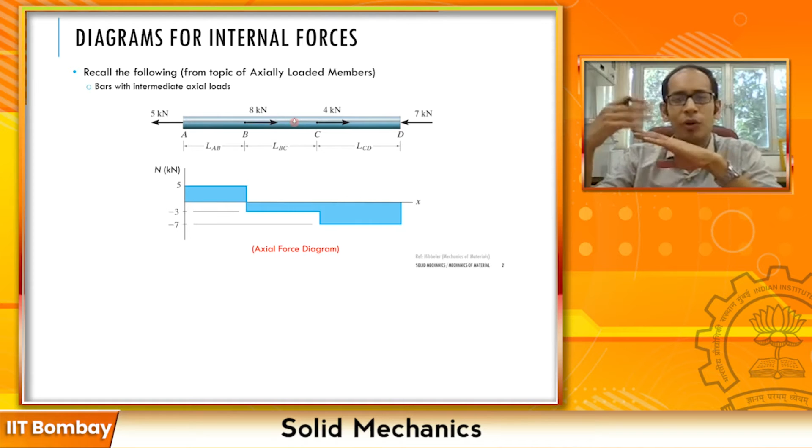But while solving this problem, while calculating the overall delta or whatever you want to calculate, remember that we had looked at each of these individual segments between the points of discontinuities of the force. We had gone and drawn the corresponding internal force diagrams.

So for example, over here, what we had done, suppose if I take a section and call this section 1, if I take a section here and call this section 2, and so on, and I can take one more section over here and call this 3.

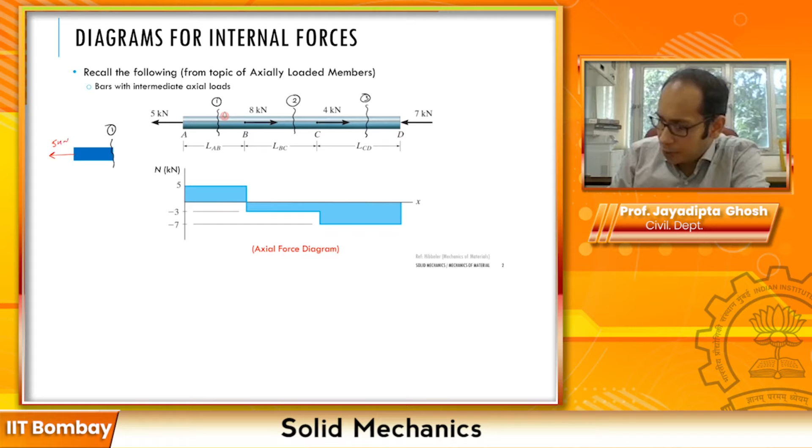Now for section 1, if you remember that when we had drawn the free body diagram, this is the part, this is my section 1. Here I have a force of 5 kilonewton, so I am going to have an internal force over here in 1 as 5 kilonewton.

So if I go ahead and draw the internal force in this segment from A to B, it is a tensile force, and for these internal axial loads, what we are saying, tensile is positive and compressive is negative. It's a type of convention. We had gone and drawn this 5 kilonewton over here.

Similarly, if you take another segment number 2 over here, and if you draw another free body diagram from this left hand corner A all the way to 2, you will find that the internal force comes out as -3. We have done this in the chapter on the axially loaded members.

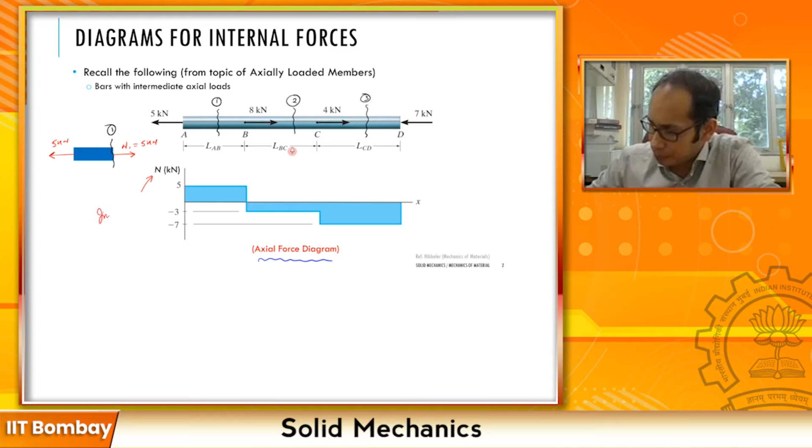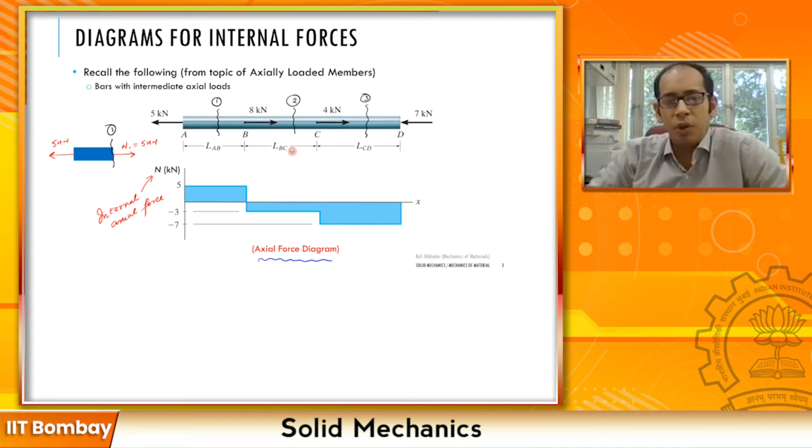So essentially what we get at the end of the day is this axial force diagram. This is also a diagram of the internal forces. Remember, this N that you see over here was nothing but internal axial force. So we have already gotten a glimpse of how the internal forces vary.

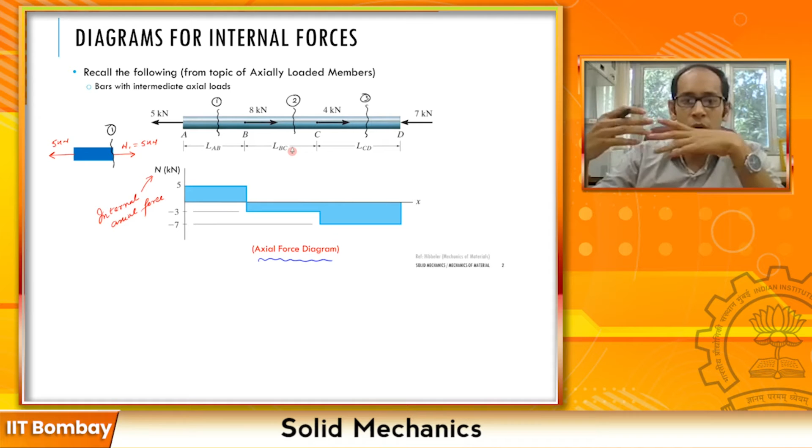Now, this is a bar which is under pure axial loading, although it's non-uniform. There are no loads which are acting perpendicular to the longitudinal axis of the bar.

So in essence, it is not functioning as a beam. Now let me go ahead and present to you a beam over here. This beam, as you see, is a cantilever beam. It is clamped at this particular end.

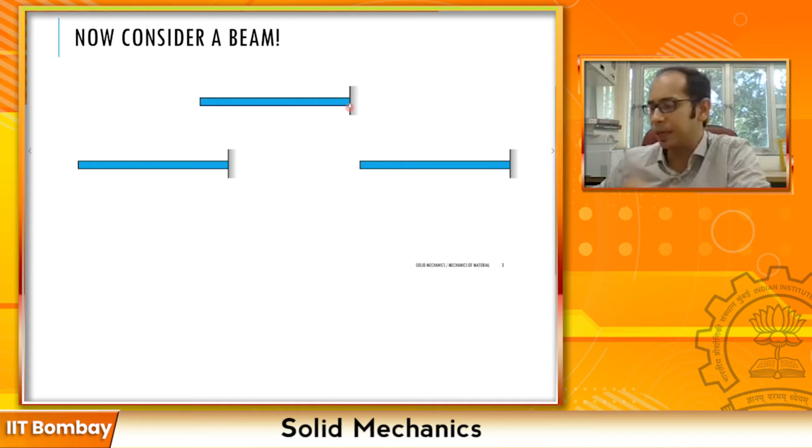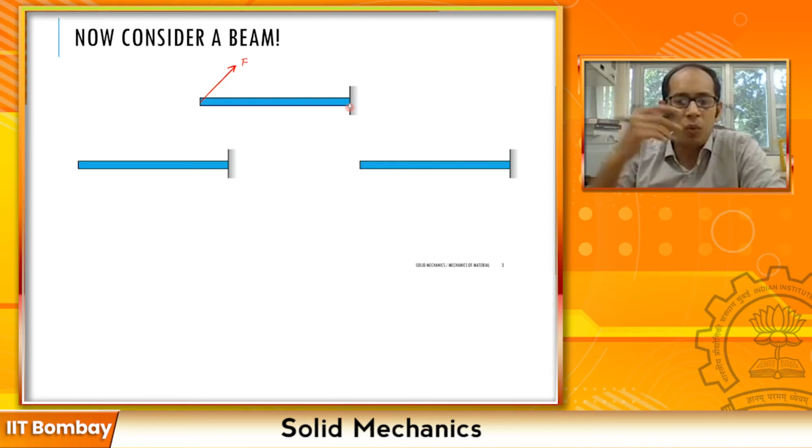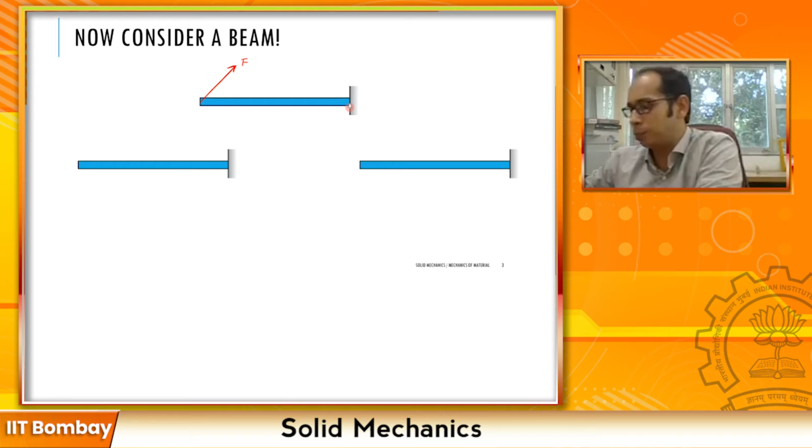Now, for this beam, if I apply a load, maybe a load about this particular direction, say I'm going to call the load F. Now what kind of internal forces and internal stresses does this load impose? For this F, I can split it into two components, one vertical and one horizontal. Let me go ahead and draw them. Suppose this is the vertical component and this is the horizontal component, and let me put names to them. Suppose this is my P and this is my Q.

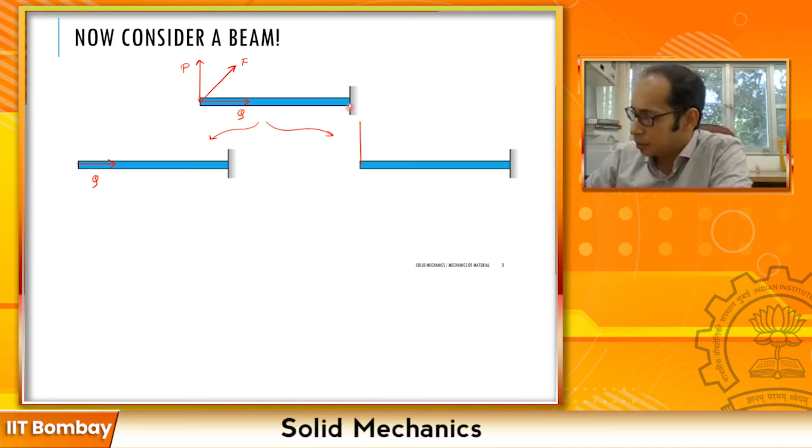Now remember the principle of superposition. This force F, I split into P and Q. Now if I apply the principle of superposition and draw this beam as two different beams, then in the first beam I'm just going to apply the force Q that is acting, and in the other one I am going to apply the force P. Both of these together essentially give me my original loading.

Now this is the case which we have already seen. We have seen that when you have a bar and you're pushing with a force Q, how the internal forces and internal stresses vary. So this is something which we have already done.

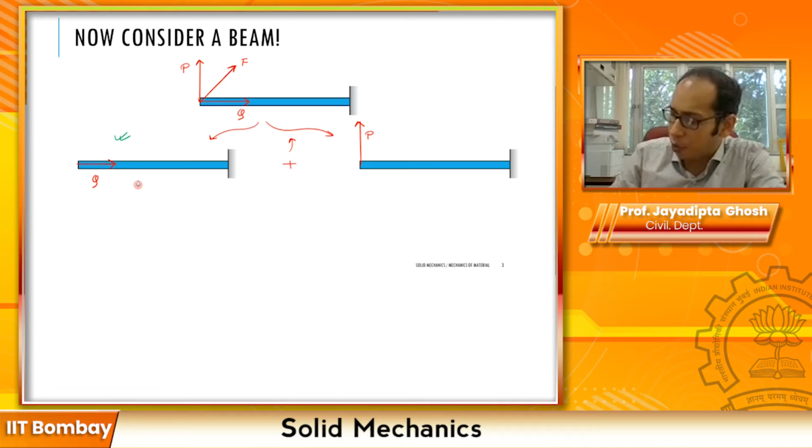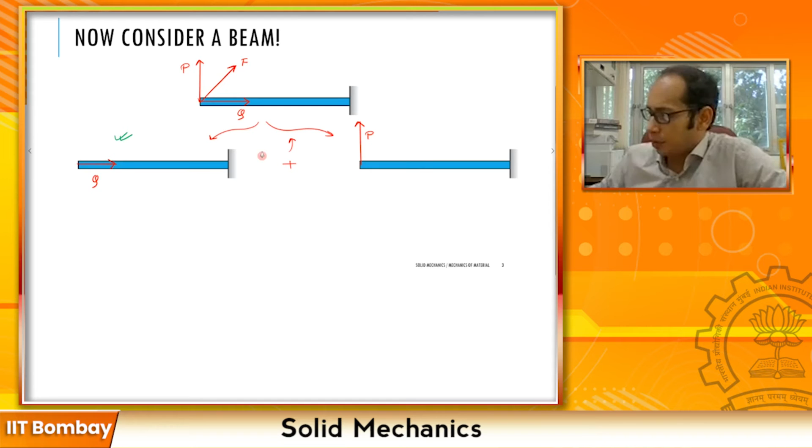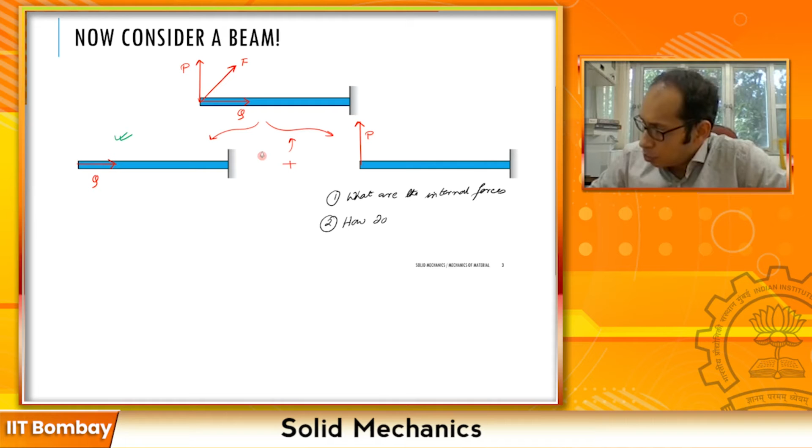Now the question is, for this particular beam on the right hand side, there are two questions. The first question is what are the internal forces, and the second question is how do they vary? We have not dealt with this case before. So for this load P, which is acting over here, I don't know how the internal forces vary along the length of the beam, and how do they vary over here. So this is the intro that will lead us to the path of drawing the shear force and the bending moment diagram.

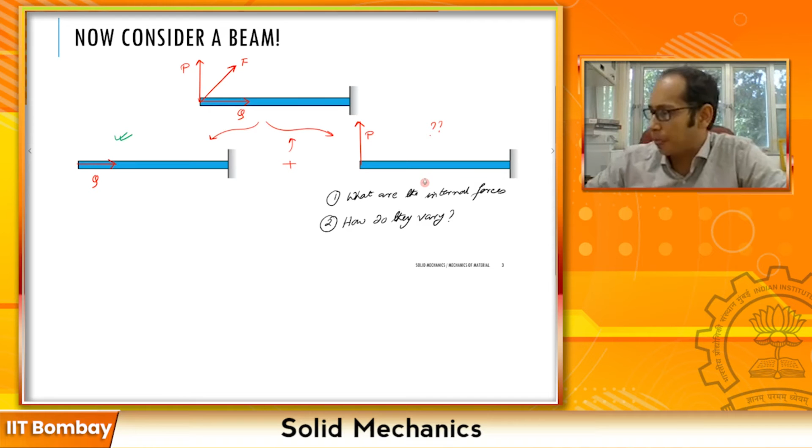Since we have already looked at this particular case, and investigated what kind of internal forces this imposes, let's go ahead and solely focus on beams where the loading is pretty much always perpendicular to the longitudinal axis of the beam. So let's look a little bit more deeply into this kind of beam structure. Now I'm going to present to you the same beam that is there.

This particular beam, A to B, as we saw before, and a load at the end, which is P, a vertically applied load. Now, similar to what we had done for the axial loading case, I am going to go and cut a section MN. So this is my section MN, where I've cut a section, and I am going to do the exact same thing.

I have a left side and a right side now. So let me go ahead and mark that. This is my left side and this is my right side over here, and I have separated and taken my left side. And this is my right side.

Now, similar to what we did, all I have to do is figure out what are the internal forces which are acting just to keep these individual chunks in equilibrium. So when I am looking at my left chunk, at this interface, I can have three kinds of forces. I can have a shear force, a force which is acting vertically down or up. I can have a moment, I can have an axial load as well. In this case, I'm not going to have any axial load because there is no force along the x direction. If you consider this is your x direction, so there is no force in the x direction, there is not going to be an axial force.

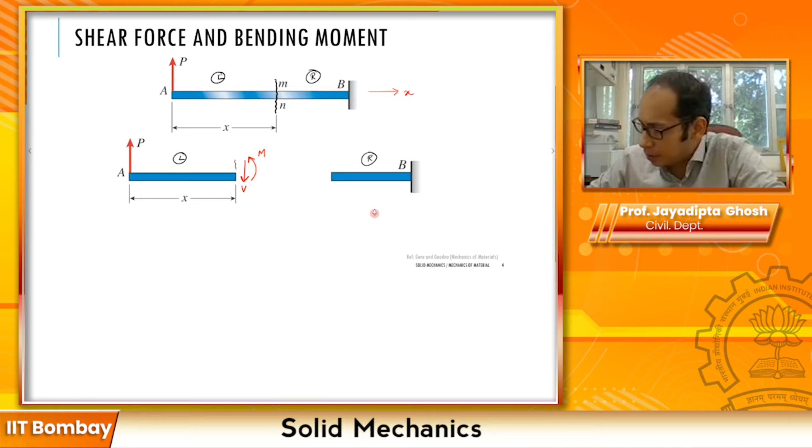So at that interface MN, the forces I'm going to have are something like this. I'm going to have a force V, and I am going to have a moment M. Now, since this section MN is the same over here and over here, let me go ahead and further elaborate. This is the section MN and this is the section MN over here. When I'm looking at the right hand side, I must have equal and opposite force V and an equal and opposite M acting over there, because that point is not going anywhere. That point is in equilibrium. So here also I will have vertically up V and clockwise moment M.

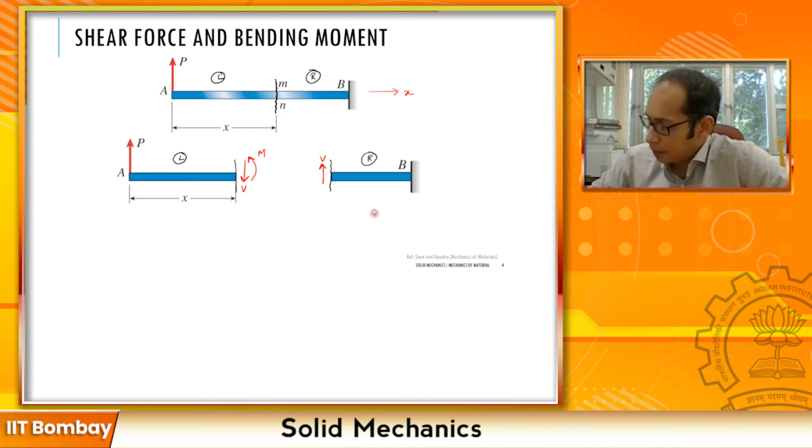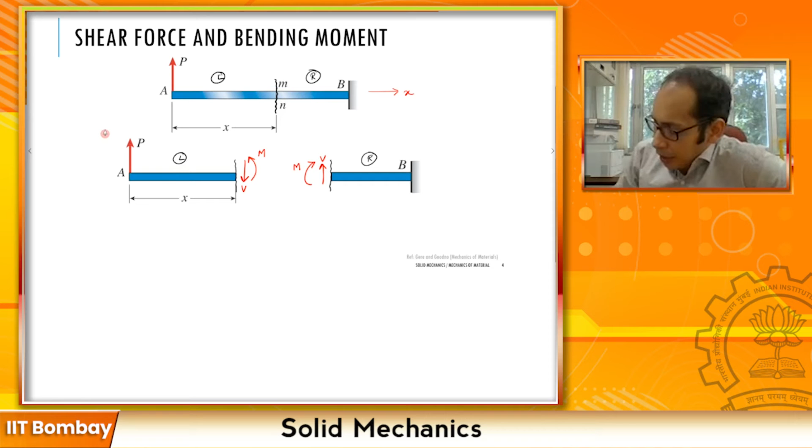Now, going from the perspective of pure establishing equilibrium, what do we get? From this particular portion, the left hand side, if I have to draw my V, if I am doing my summation of Fy equals to 0, this gives me my V as equals to P. So my shear force that is acting, V is the shear force. Let me write it more explicitly. So this V over here is shear force, and this M is bending moment.

So my V is equal to P over here. And how do I find the moment? If I take the moment of all forces about this section mn, doing moment equilibrium, summation of moments must equal 0. That gives me P times x, since I've taken this section mn at a distance x from the left, equal to P times x being a clockwise moment, plus V times 0, since I'm taking the moment exactly at this section, minus M. This gives the overall equilibrium equation equals 0, which essentially gives that your bending moment at that point is P times x.

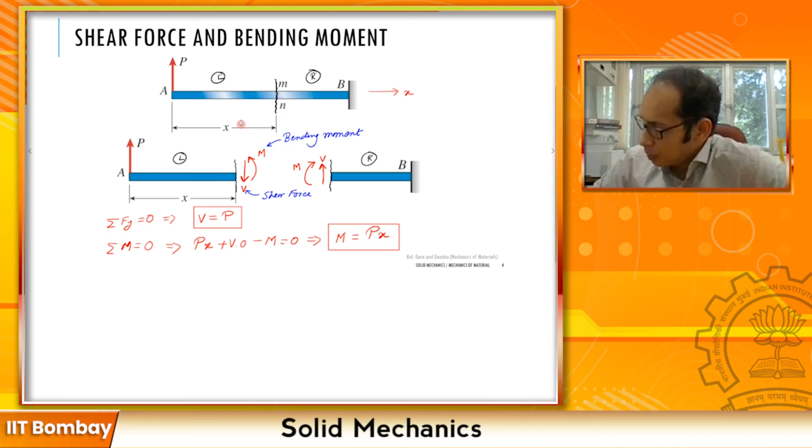Now try to appreciate what we just wrote. For this cantilever, with a load P at the left end, it does not matter where x is, my shear force anywhere I take is going to equal P, because V is only dependent on P, not on x. Whereas your bending moment at any section depends upon the load P and also the distance where you take that section. So it is P times x.

So this is a case where shear does not vary as you go from left to right, shear stays constant - we'll see this again when we draw the shear force diagram - and the moment is a function of x. The moment keeps on varying. The moment is 0 at this free end where x equals 0, and as you keep moving, the moment becomes a product of the load times x.

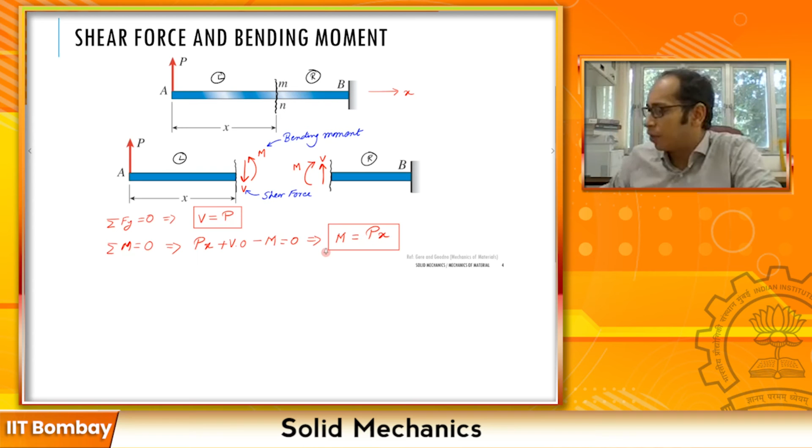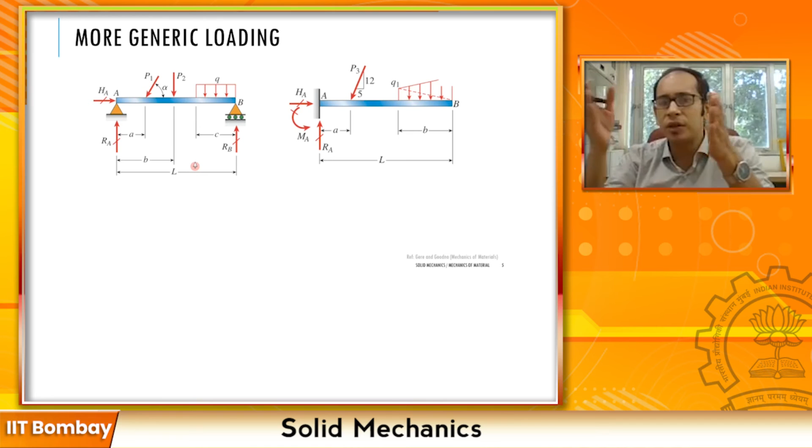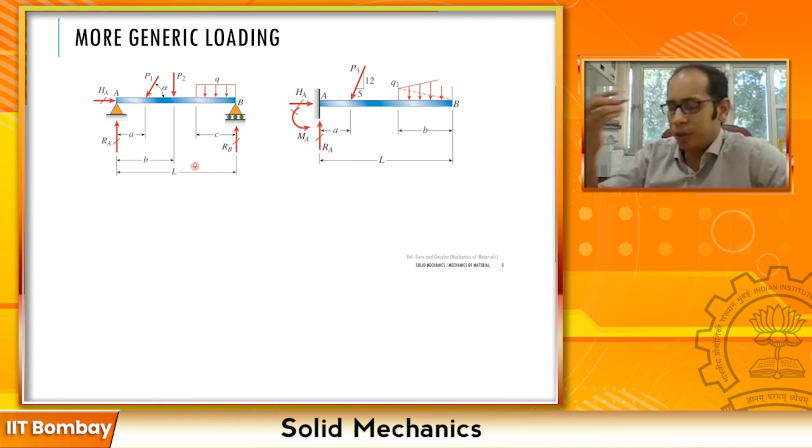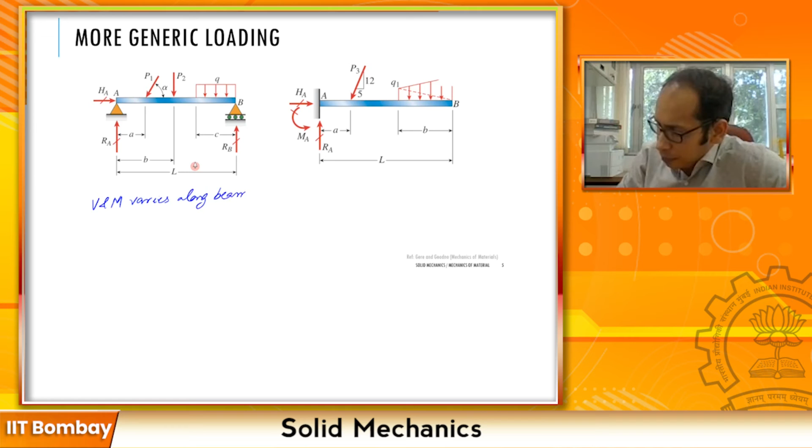So let's make a general note: V and M vary along the beam, depending upon the nature of the loading and the type of structure. So in a nutshell, how do we represent the variation of V and the bending moment M? We saw that the shear force and moment vary, but how do we capture that? The best way is to draw diagrams showing how, from end A to end B, depending upon the loading conditions and structure, the shear force V and bending moment M vary.

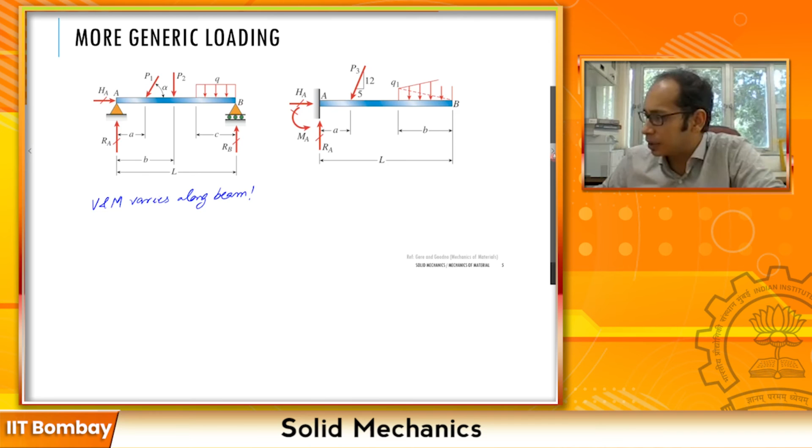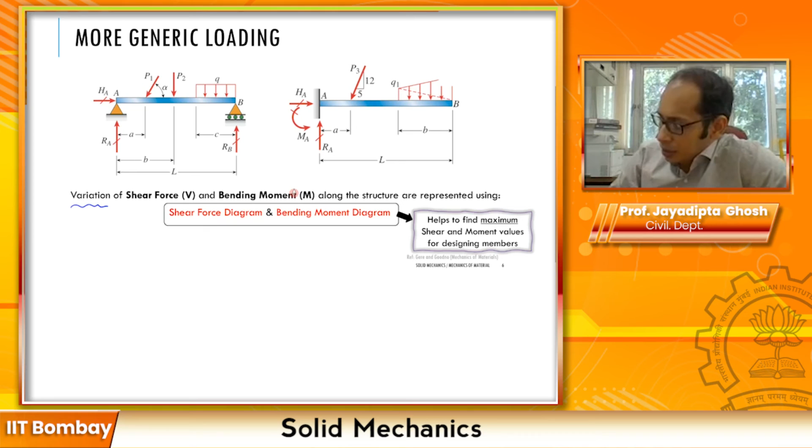So this is essentially what comes next: the variation of the shear force V and bending moment M along the structure is represented by the shear force diagram, usually termed by the acronym SFD. And for the moment, we have a corresponding bending moment diagram, known as BMD.

Typically in short form it is used that you draw the SFD and the BMD of this beam with this particular loading, right? And why is it important? Why are we doing all this? Why are we trying to break our head and take a beam with loads and find how the shear force and bending moment varies?

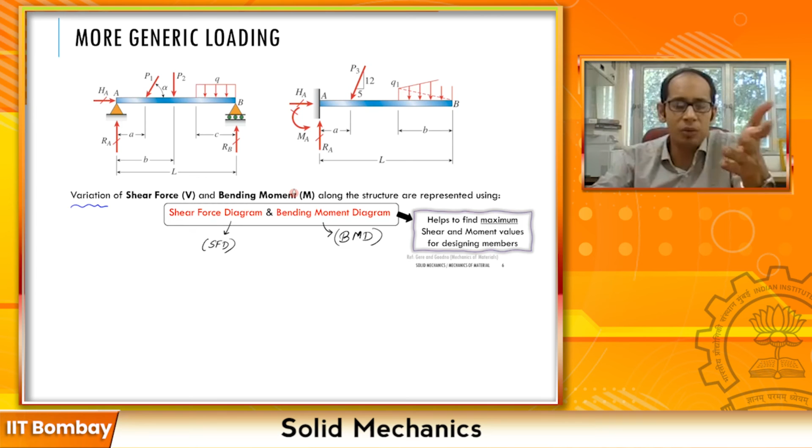The critical point to remember is that you design structures such that they don't fail at the points of criticality, within your structure, the room you're sitting in, the beams, columns and slab. The points along the beams are subjected to different kinds of loading, same with columns. If you draw the shear force diagram and the bending moment diagram along the length of the beam, you will see that there are points where these values peak, where they become maximum.

So if you keep increasing the load, these points become prone to failure. So the shear force diagram and the bending moment diagram help you find the maximum values of the shear force and the bending moment so that you are designing safe structures.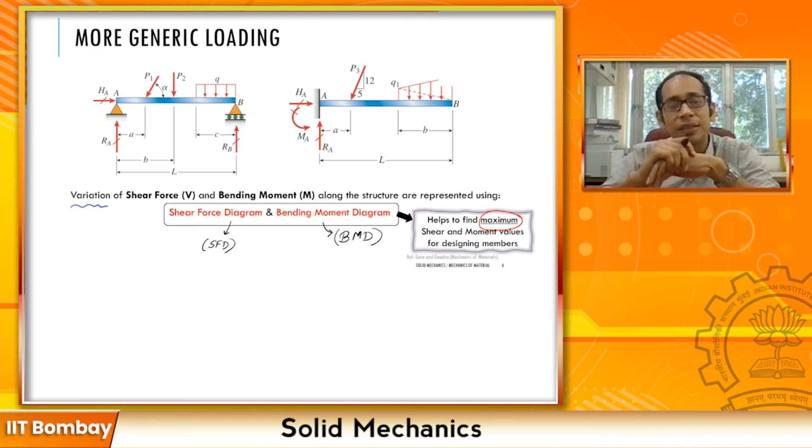This is applicable for civil engineering structures, mechanical engineering structures, aerospace structures, and has a wide range of other applications. So the whole objective of drawing shear force diagrams and seeing how shear forces vary across the structure, and how bending moments vary leading to the bending moment diagram, is so that you are designing structures which are safe to resist the loads the structure expects to undergo.

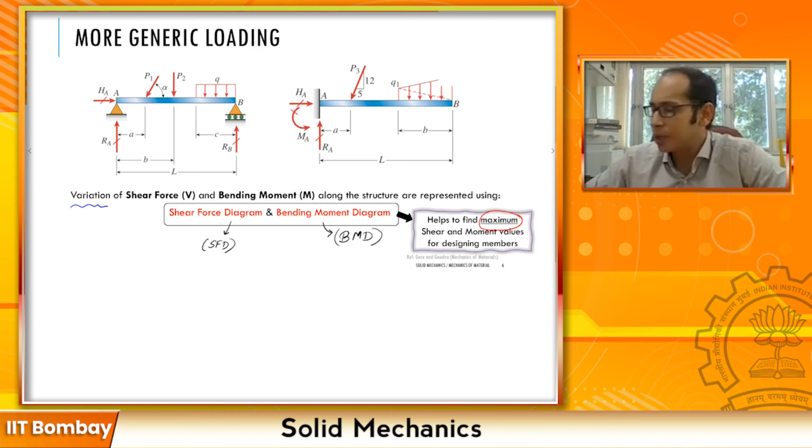Now, one thing I want to bring your attention back to: we wrote for this cantilever beam, which we just looked at, with an end load P, the shear force V and the bending moment M. Now, what is the convention?

Remember, we always have to deal with some conventions so that you and I are talking the same language. What's positive to you may be negative to me, but we have to have one convention so we understand each other. That's the whole point of having conventions anyway.

Remember that in axial loading, we also followed one convention: if the bar is under tension, that's positive. Probably you followed the same convention when you studied trusses in engineering mechanics. If the truss member is in tension, it's positive; if it's in compression, it's negative.

For the shear force and bending moment, there are also conventions. For example, take this beam: this section MN, I could have cut going from left to right or from right to left. When I cut this section from left to right, I have this V pointing downwards, M here, and at this point you have an equal and opposite pair.

So what is the positive convention for a positive shear and a positive moment? The positive convention for shear is that if the shear force is trying to rotate your element in a clockwise manner, that is called a positive shear. Take a look at this figure: this force V, if this is your element, tends to rotate the element in a clockwise manner.

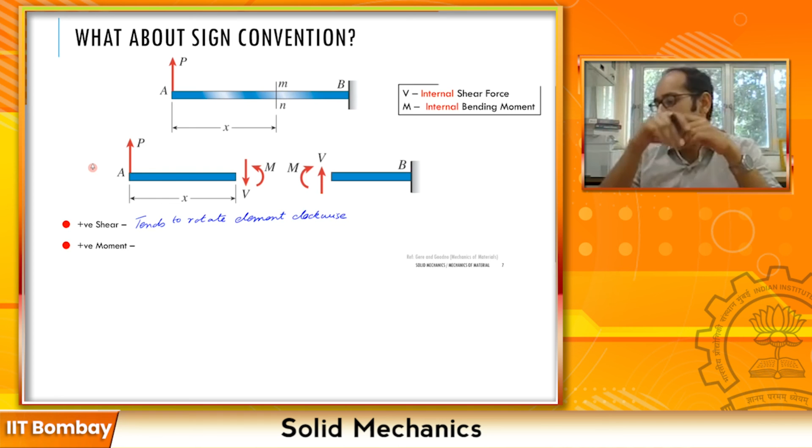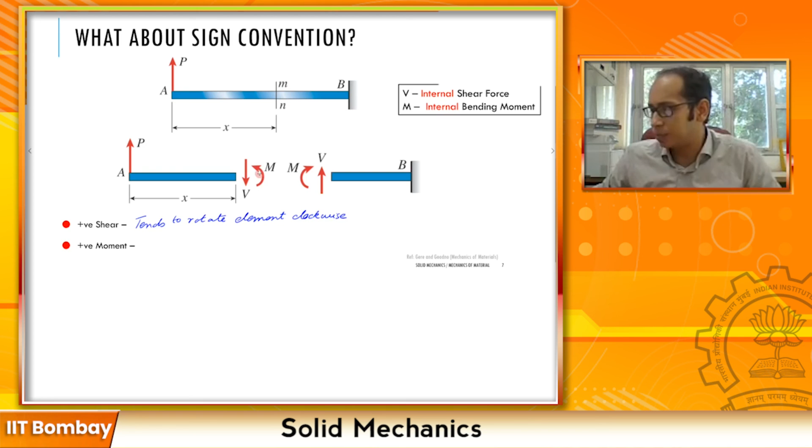And what is a positive moment? Well, the moments we have drawn here are also positive, which probably gives you a hint of what we mean by a positive moment. A positive moment is the one which turns your beam into a trough, or causes sagging. What I mean is, if you consider this moment M, what it essentially does is make your beam curl upwards.

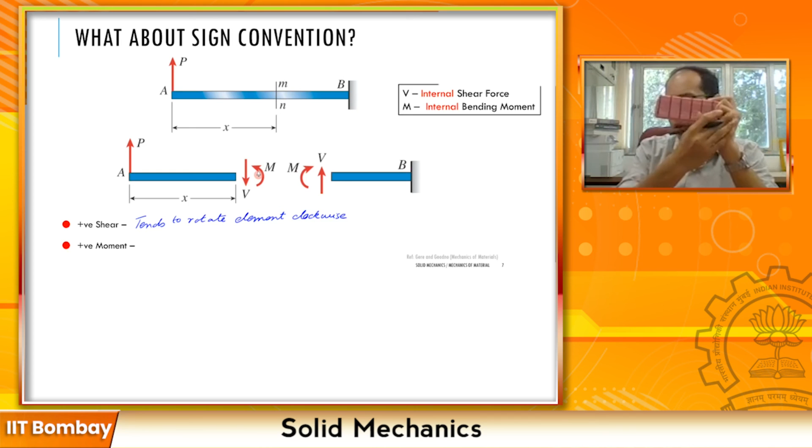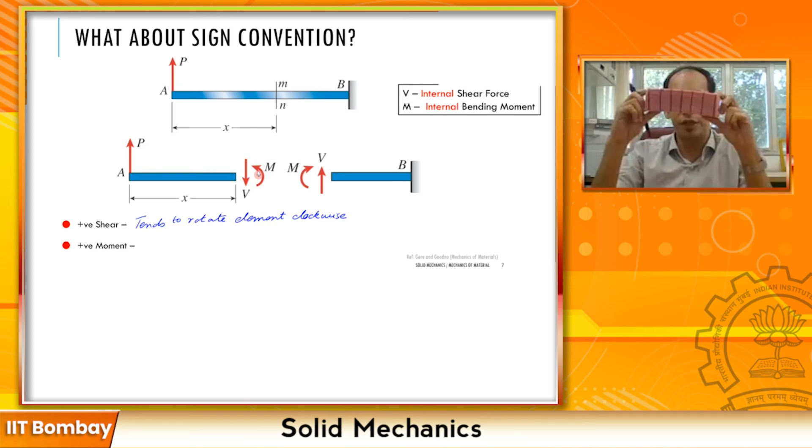So if this is my end A, this moment is trying to sag, causing a sagging of the beam. There are two kinds of phenomena: this is called hogging, and this is called sagging. The easiest way to remember is that sagging is the smiley face.

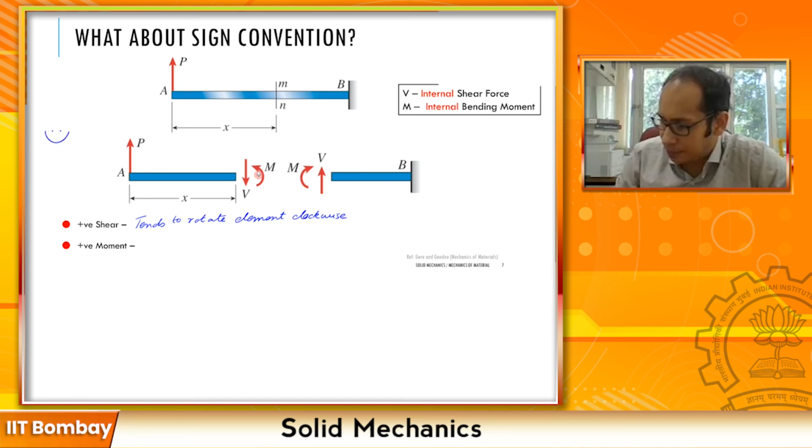So if you draw it, this is my sagging. Sagging means a smiley face, and a smiley face is a positive thing. So that's the best way to remember what is the positive convention for a bending moment.

So this bending moment tries to turn my beam into a trough, causing a sagging kind of phenomenon. Similarly, this equal and opposite bending moment also tries to convert the beam into a trough. So in this case, if this is my clamped end B, this is also a sagging kind of moment. So a positive moment is the one which tends to cause sagging.